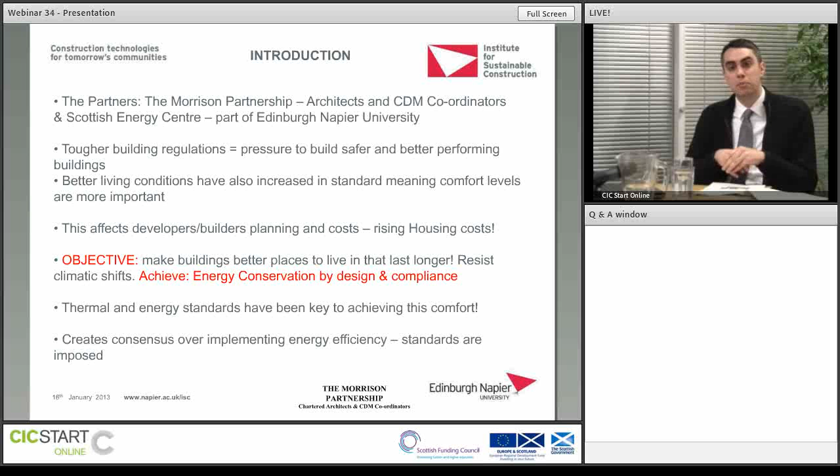A lot of these elements will be touched on in this presentation. How energy efficiency and the rating of buildings has become quite an important way of predicting how buildings are to be occupied and how to work. That's been an important element and benchmark that a lot of people take on board at design stage. Technical standards, handbooks, and technical details have also been very important, how people use those as a guide during design, or as a benchmark, is also important.

And the way different literature and guidelines, like the Sullivan Report back in 2007, has been really important in how policy has been framed, and how people's way of imposing standards and building regulations has developed. And obviously the European Union has been important as well in imposing a lot of these guidelines.

But really the study looks at the possible sources of this gap, which we will identify later on. It's this gap between what's been designed during a long research process in terms of design, and the occupant, and how that's been transported over to the construction stage and during early occupation. There's been identification of a big gap, especially in the energy use of these properties, and we'll be looking into all types of buildings in this report.

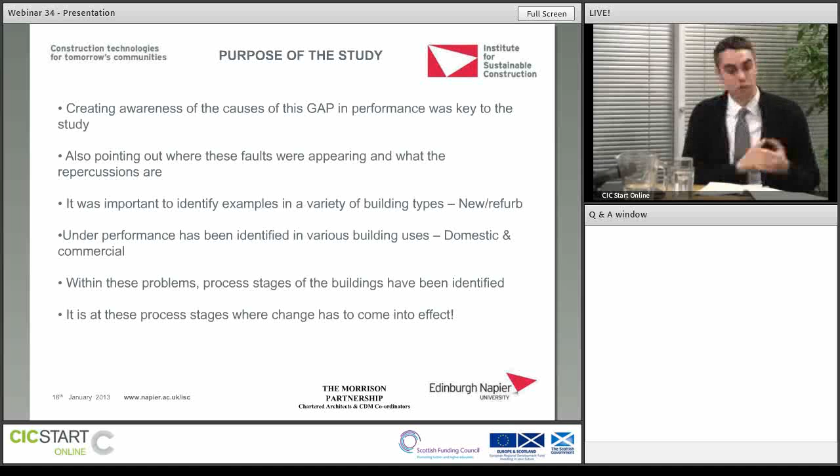I'm going to take you through the next few set of slides which try to establish the reason behind why we set forth on this path of study. On this particular slide, it begins to introduce, further down at these bullet points, some of the issues we early established with our research work.

First, we identified that for most buildings you would either be in the category of new build or refurbishment. The second area was whether or not you would be in the domestic sector, or we've called it commercial. You might read for that non-domestic, but it does have some importance to call it commercial, because it widens out the building types that are not covered by much of the research work.

Many organizations, such as NHBC, Good Homes Alliance, and the Carbon Buzz website, have done a huge amount of investigation and preliminary reports about this whole issue of a gap between design and build, and we've reviewed some of that literature. But what we wanted to do was broaden that view outside of housing to look at retail, offices, industrial, commercial premises, schools, factories, because there was very little focused research going on in that area—most was in the domestic area. So it's important that we're looking at both domestic and commercial fields.

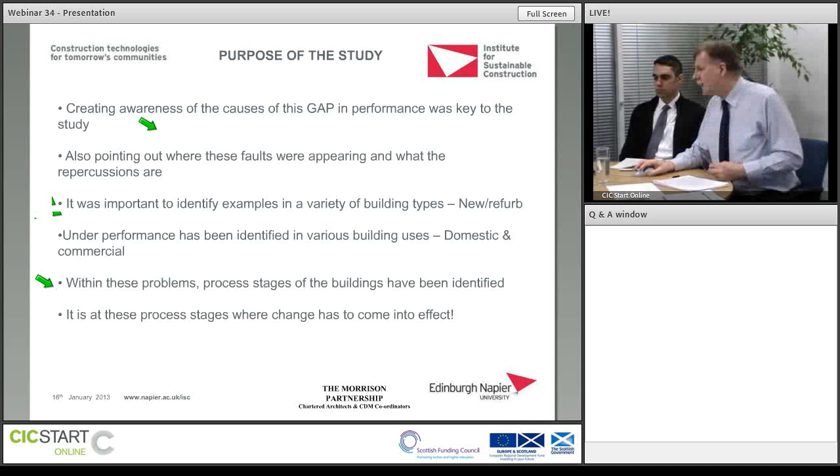The end user in the domestic sector may be someone in a housing association flat—they may have learning difficulties, they may not know how things work or how they're meant to work. Then on the commercial side you have a building maintenance manager who may be well acquainted with how the systems operate. So there's variety within these 12 sections of the proposal that require individual and specific streams of research. There will be crossover, but these are 12 good, solid areas which later in our presentation we propose will be a substantial outline for further research work—12 good areas to look at.

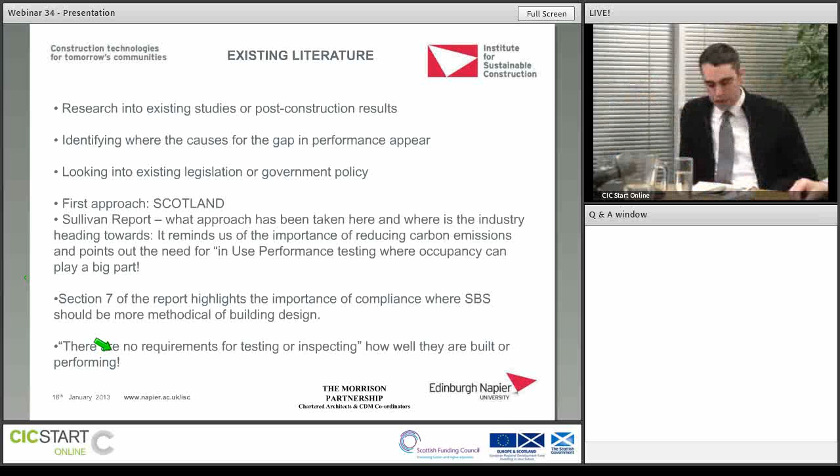Julio. Thank you, Cameron. As Cameron just pointed out, it was important for us, before diving into the real problems, to really explore what literature was out there, whether it was in the form of reports, websites, groups that were addressing such problems, and also post-occupancy results and surveys that had been done before, and really looking at some of the areas that were highlighted as problems. It was important to identify these causes through this existing literature. And really our focus, as it's been said at the beginning, was Scotland, looking at what has been done in Scotland, what buildings have been addressed, what problems have been encountered.

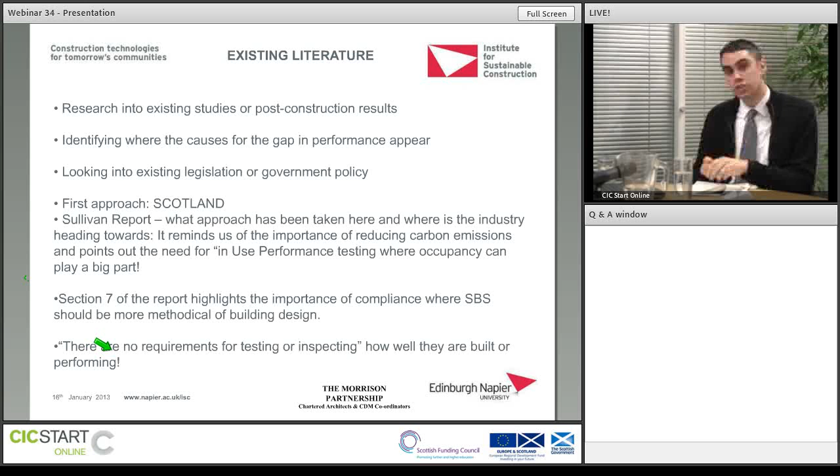It was also important for us to look into the Sullivan report. Although written and published back in 2007, before the bank crisis, it does point out very important elements that have been highlighted as action points that I think could be important to continue on. And in this situation, 2013, look at how it's been addressed and what to look out for in the future. And I think Section 1 and Section 7 in the Sullivan report highlight these problems quite nicely, and look at solutions as well. But really it's looking at testing, monitoring of buildings, coming up with a catalogue of results and benchmarks of buildings that have been assessed, and looking at occupational issues, etc. So that was important for us to read on.

It was also good to start exploring other avenues in terms of different professions, both the design professions, the architectural profession, the construction industry as well as a core. And one of them was the RIBA and any publications they had, together with the Carbon Buzz, as Cameron has pointed out before, but also looking at how the RIBA plan of work, which is used in the industry as a guidance on and sequence of elements to take on board while designing and tendering, etc., has a gap where the RIBA hasn't imposed a step for testing and monitoring of what's been built in any project. There is guidance on design, there is guidance on taking the project forward, but once it's been completed, there isn't that approach to seeing if it's performing properly. And we feel that is missing.

And we also explored documents very similar to what we've been looking at, a lot of them published by the NHBC, which are the core of housing and standards of living and construction. And they've highlighted through the NHBC Foundation, together with Zero Carbon Hub, some interesting booklets and also papers on these elements of performance and where the gap is, and we made a lot of notes on that. They've also got a lot of literature around predicting and the software used for such energy predictions, which I think are also important. And also looking at post-occupancy studies, for example, the Elm Tree Mews developed by the Joseph Rowntree Foundation as an example of a building being assessed and really inspected very thoroughly in terms of its performance.

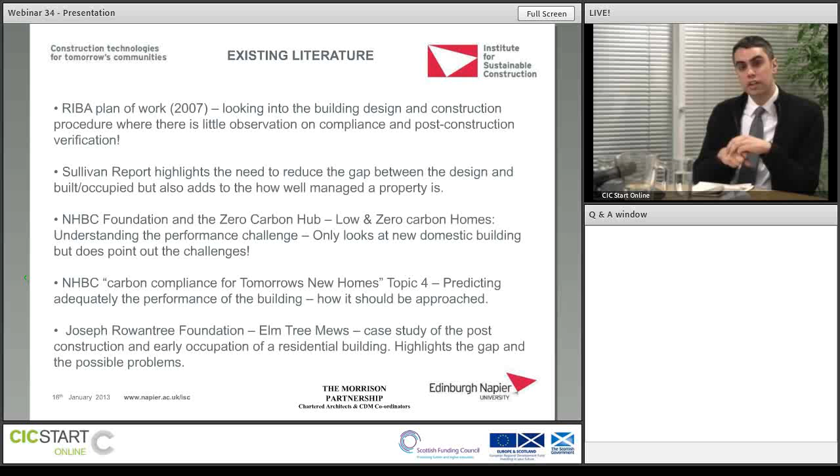But really, in conclusion, we've seen that a lot of the literature focuses on new build. A lot of the documents look at domestic problems and housing developments that have been assessed, but not a mixture of commercial, non-domestic, and also retrofit. We feel that a lot of it has been focused on the new build sector. And we feel that retrofit has, in this day and age where there's little money for new developments, a bigger role to play in terms of achieving better standards, and also proving that any work that's done on retrofit is actually worthwhile and important.

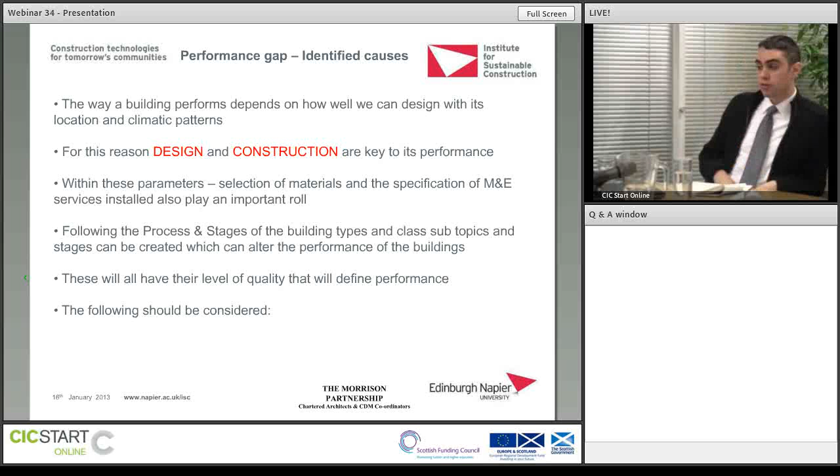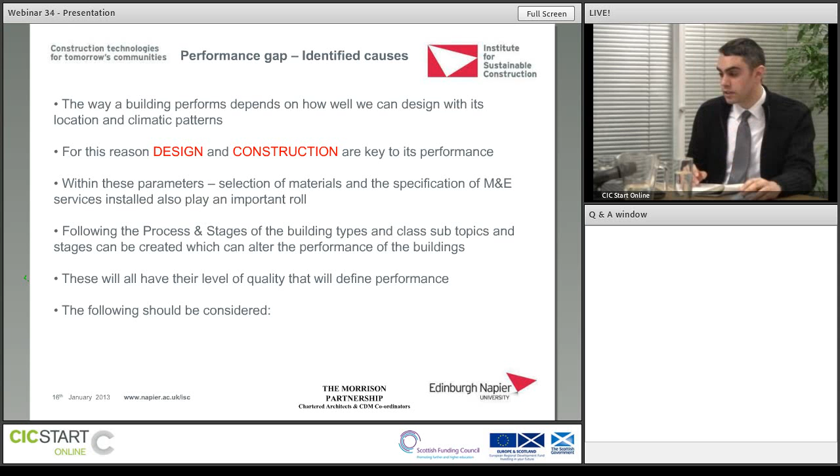So really, we move on to identifying these problems, and we've explored many of them. A lot of them around the design and the construction element, a lot of them around the prediction and also the actual testing of buildings. So it's important to really look at these points and see where we feel that further attention and further work is needed in the industry. And through the diagram that Cameron was talking about with the different stages and the different typologies of buildings, we feel that could be tackled quite nicely. But the following are some of the areas that we feel are important.

Already Cameron has talked about SAP as being one of the important tools within the design industry, and obviously the prediction of energy use of buildings. And that spans from the fabric of the building to the actual services that the building will have implemented into the everyday use of the building. But we've really got to put a lot of emphasis on the quality of the software, the information that it has, whether it's up to date, whether it is accurate enough.

A lot of the times it's very generic in terms of the materials used. And as we evolve as an industry with more innovative materials and more innovative building procedures, this software seems to be lagging behind in terms of updating this information. Although SAP and SBEM is updated on a regular basis, we feel that sometimes it's not at the same rate. And sometimes it could be down to the type of materials there, the climatic data, or simply the technology that it has.

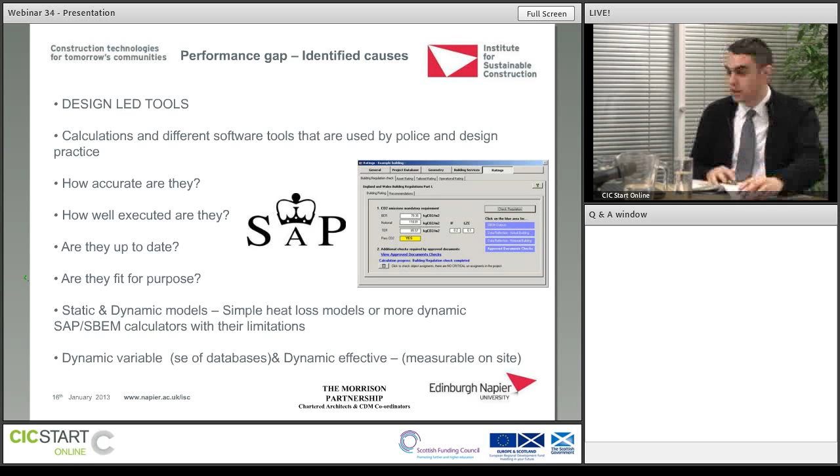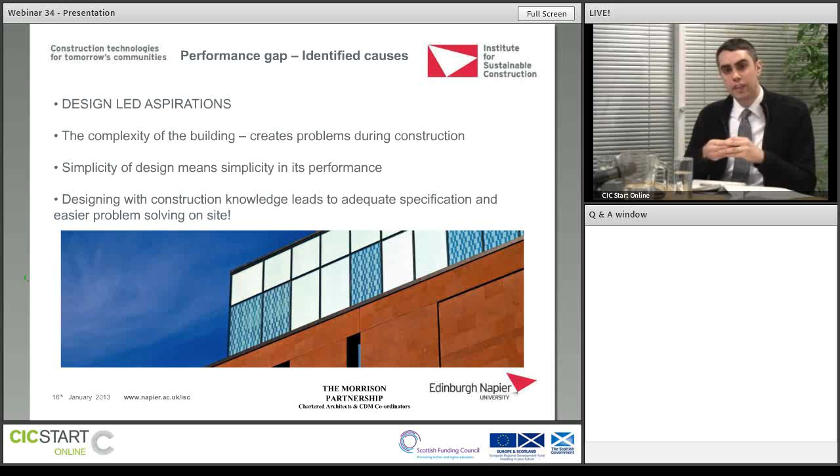Another element that we've identified is really the design-led aspirations and how complex buildings are becoming, and whether the design stage is building up detailing and proper detailing for the construction period, for the trades to understand properly, for different sequences between construction, if they have been thought of during design. All that contributes to how complex the design is and the building will be. So there has to be that understanding that whatever is designed has that thought of how it's going to be constructed, and generally that is taken on board, but a lot of the times that can bring some complexities later on, so that's important.

Another aspect is a design-led specification. We could be specifying very generic and very kind of common materials that are known to us very accurately. But in other forms, it's relying on third-party information. We are in the hands of information and testing that we don't know if it's accurate or not in terms of materials and performance, in terms of systems and technology. So we're really relying on whether that information is accurate.

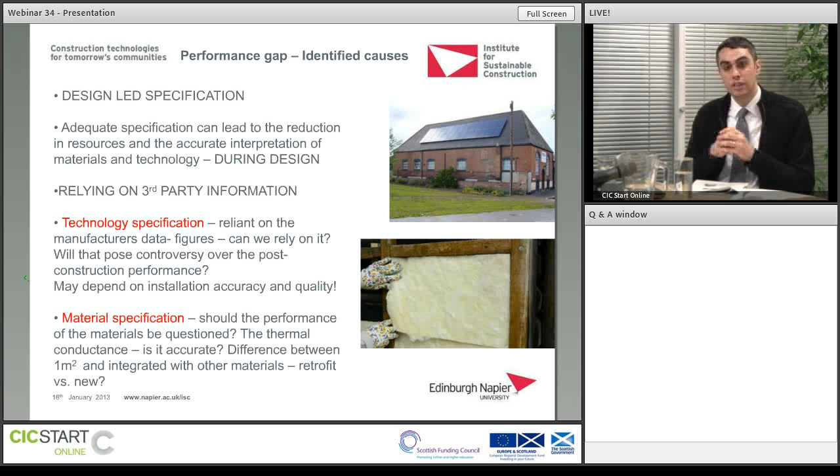And also thinking that most of that information is before it's been implemented and before it's been led into the building and once it's been occupied. So there's that difference. There's the performance of a material or a technology before it's been used and once it's been implemented and used. So there's two different efficiencies as such that have to be taken into consideration. So that's something that we feel is quite important.

And another topic is obviously on-site workmanship and the quality of build that we're having in the construction world. Are we relying on workmanship as it stands? Are the trades shifting? Are they modernising themselves to new materials, to new ways of building, to new standards? We're at design stage, we've got a set of guidelines that we've got to take on board. We've got to obviously have the SAP scores as high as possible. But is the building trade aware of this? Are they shifting with these standards at the same time as we all are? That's important. And that's where training skills and having these skills up to the higher standard is really important.

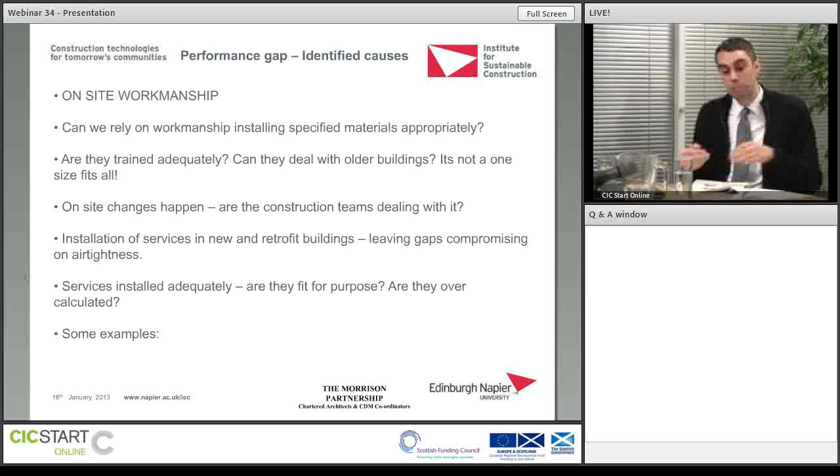Also looking at retrofit and whether people are knowledgeable enough on older properties. Are the trades and building professionals aware of older materials and how to integrate new procedures and new materials blended in with older materials? All that brings a lot of confusion on site, and if the proper professionals are not engaged and briefed properly, that can bring in a lot of problems that will later be shown within the performance of the building and create this gap that we're trying to identify.

And in the report we have quite a lot of examples that we've been involved in, both Cameron at the design aspect and the construction supervision and quality of build, and also ourselves in the Scottish Energy Centre looking at energy, heat loss, looking at elements in which it's quite evident where a lot of the gap could appear, and a lot of these are during construction, elements that have been missed or have just been badly installed.

And we've got photographs here where, for example, there are gaps in the structure. There's concrete slabs that have not been filled properly for whatever reason. We've got pipe work going through different layers of the building fabric without considering air leakage around it, and different ways of sealing or applying some gasket around pipe work. We've got missing insulation in some areas, near the eaves, for example, at rooftops, where there's enormous big gaps of heat loss or thermal bridging, where there could be energy escaping.

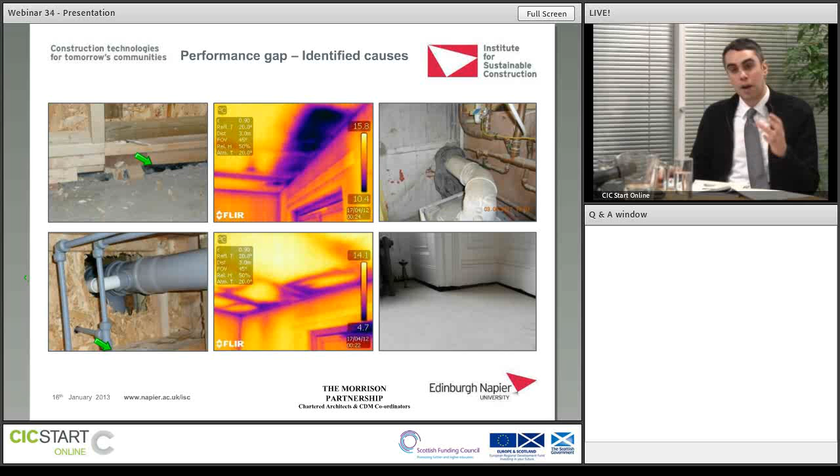And onto the retrofit area, where we've got a complexity of generations of pipe work that is no longer in operation, but has to be mixed or applied to different more up-to-date pipe work. So that confusion within the trades while dealing with retrofit is quite important. Gaps under skirting boards, etc. All that amounts into this percentage of increased energy use, which has been talked about previously.

And I mean, part of construction is on-site communication. As we know, when we design, we aspire that the project will continue with no problems, that the sequence that we've applied and that we've envisioned will go smoothly. But we know that once in construction, that doesn't occur.

And communication of any changes, of any stopping in different sequencing or changing in sequencing of materials or application of detailing has to be communicated properly to all the trades, so that possible changes and the reasons for some on-site or construction problems can be mitigated as much as possible.

And we've got elements that are kind of difficult to predict. You've got client changes during construction, you've got architectural changes as well. You might have delays for weather, you might have delays because of the budget and the funding for such projects, etc. So all these amount to changes that need to be communicated around.

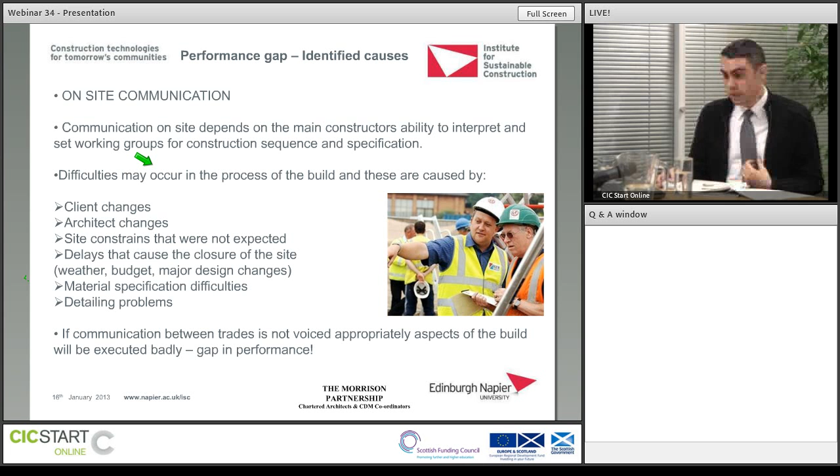So it's important also to link in to the retrofit way, and how we can monitor retrofitted buildings, because it's a whole different ballgame in terms of building and materials, etc. So the quality of that is really important. And the occupant behaviour.

It's difficult to predict during design time, and if predicted during SAP or SBEM or any other simulation software, most of the time that occupational use or pattern is modified, let alone the unregulated use of energy that is not taken into account in a lot of software these days. So all that accounts into how the building will be used, and eventually how much energy will be used in the building. So that's important, and that's where social patterns come in.

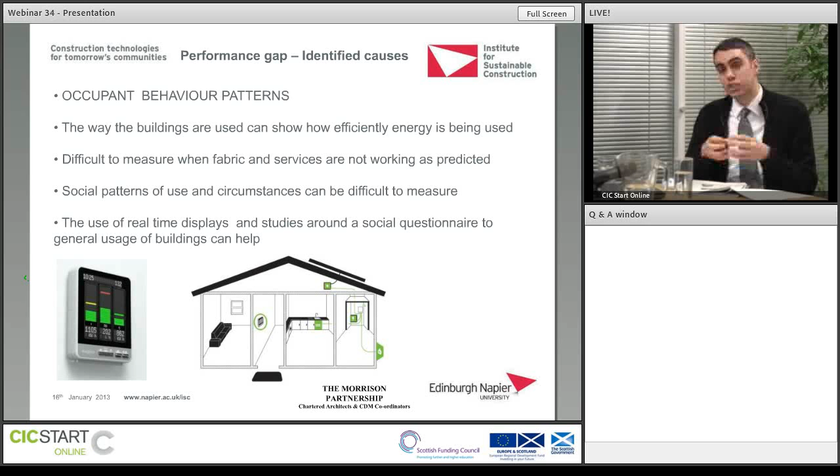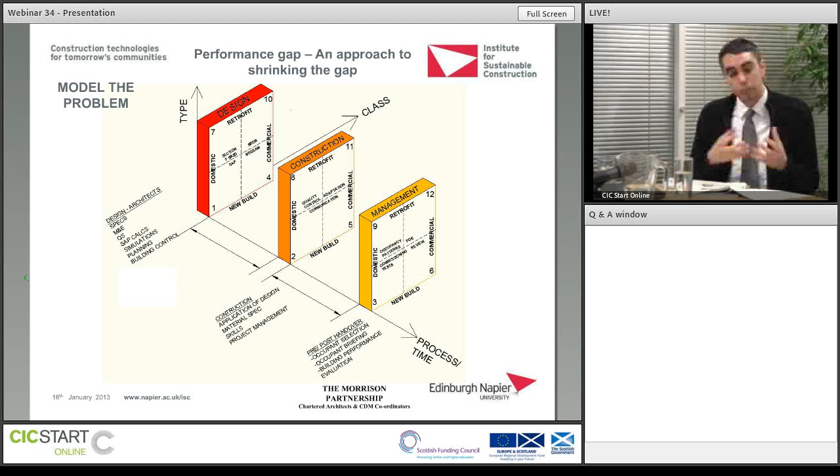You've got different elements of predicting this, and really having also technology that can measure the actual energy use, that can later on give us information on whether it is as accurate as predicted. I'm going to pass on to Cameron to talk a bit about our approach to shrinking this gap after identifying all the different elements of problems. Thank you very much, Julio.

I want to chat just for a moment about the diagram that we have on the screen here. Let me just pick up the little arrow here. Do I have to click that there? Is it a click and drag, or...? It should be once you click it in, but... There we go. Yep. Right.

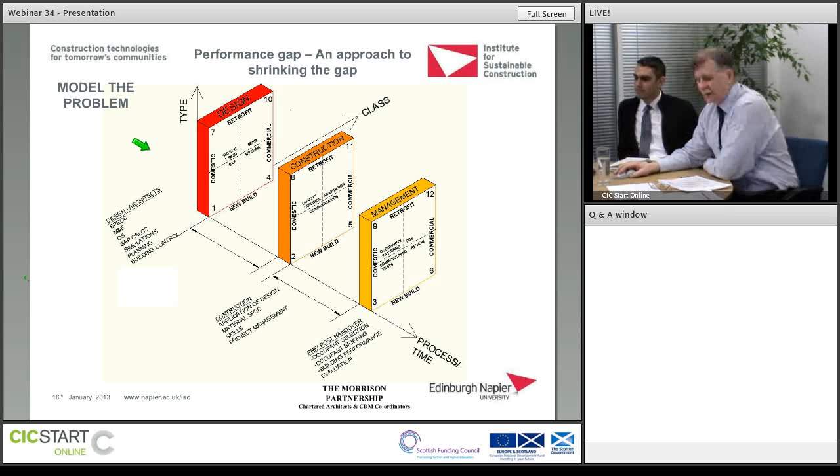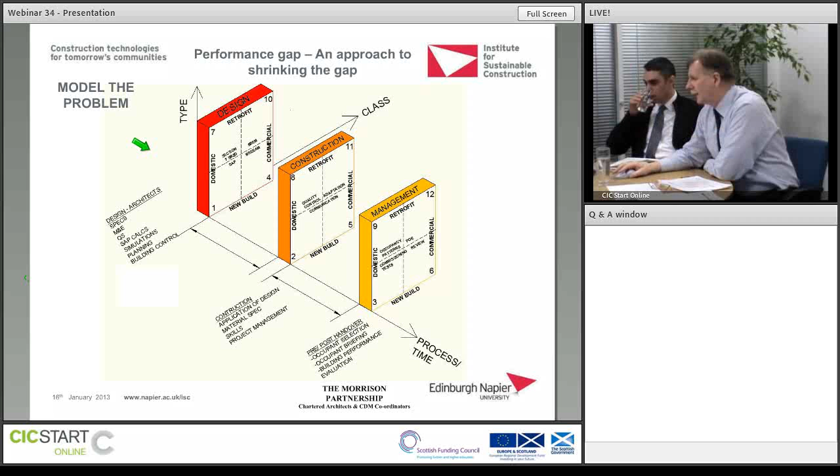This little diagram is meant to be the three-dimensional conversion of the two-dimensional tree that we were discussing earlier in the presentation. We took that two-dimensional tree and put it into this X, Y, Z coordinate system to show along the X coordinate the process as might be followed by, for example, the RIBA plan of work over time. The Y-axis indicates the difference between domestic or non-domestic commercial within each project, and the Z dimension takes the variation between anything that may be regarded as new build up to refurbishment.

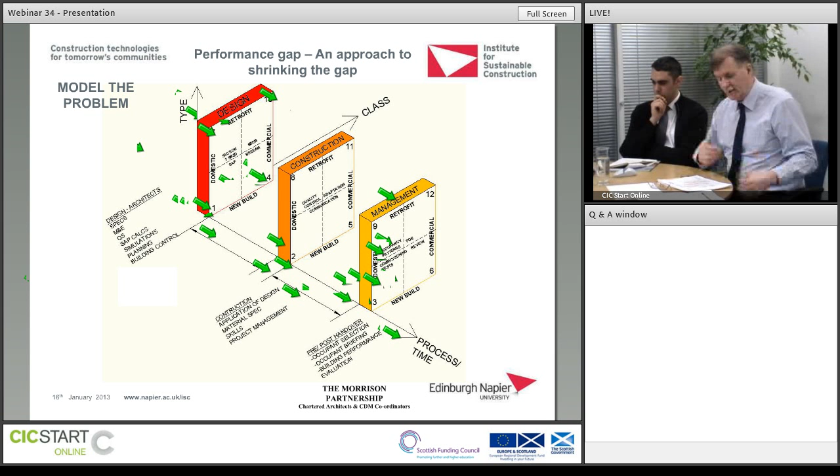And so within this three-dimensional modelling of the problem, we began to identify the various areas where the research strands would be fitting. You can see here that the numbers in each of the corners relate to the 12 research strands that we identified earlier. And within each of these planes, you can see some of the issues that will be occupying some thought, for example, in the management section, things like occupancy patterns, commissioning tests, and post-occupancy evaluation. And so you can see three-dimensionally the complexity of the whole performance gap issue from start to finish across all sectors, across all types.

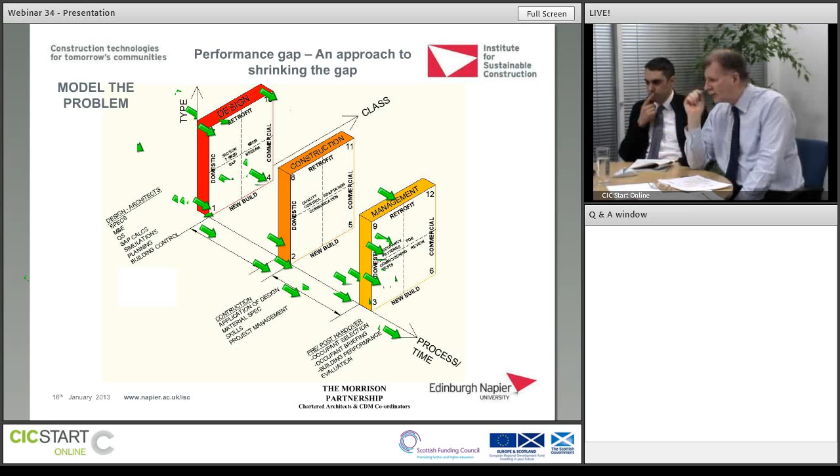I don't really want to dwell any more on this diagram, save to say that you could look at it perhaps after in replaying this webinar. But it's important because it starts to model the problem. Julio and I, in beginning this initial modelling stage, may well take this further and develop some more ideas about it. But it's a first stage, and it came out of much of the research work that Julio has been describing in the past 5-10 minutes. So I'm going to pass back now to Julio to take us through some of the other slides which lead us into some of the approaches we identified to start to shrink the gap.

Thank you. Well, as I've identified before, we could probably differentiate the different approaches together with that model on the fabric performance, on the technology and the services performance, and also on the occupants.

Approach and occupancy patterns. But we know that fabric performance could be described as a kind of known science in terms of how we calculate U values, how we identify heat loss, and how we can try and reduce that kind of wasted energy in a lot of our envelope around buildings.

And there's a big distinction between new builds and retrofit. In new builds you've got a bigger scope in terms of a design stage where you can plan and better model a building, and in retrofit you've really got that element of investigating what we have and making a survey of the actual current performance of the building. Both of which obviously have different solutions and different approaches.

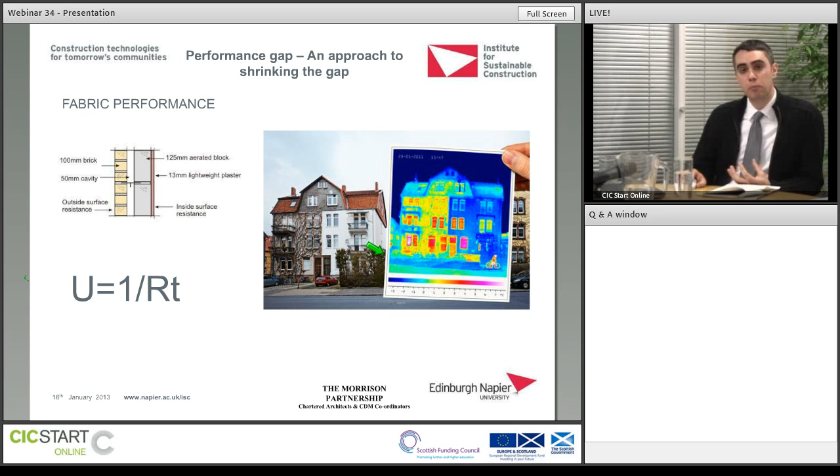But addressing fabric is really important, and that's one of the areas where we feel there has to be more focus. From predicting and monitoring using infrared thermography and looking at ways of insulating properly in retrofitted buildings, or from the actual new build aspect of really detailing as close as possible any junctions or any elements.

But there are areas where, while we're predicting, while we're designing, it's very difficult to really model—it could be from repeated timber studs, for example, in a structure. We could very easily design something that is every 600 centres and doesn't really have any problems on the predicted side.

But once we get on site, once we're building that, it might be that there could be repeated studs for whatever reason, because of the sequence or because of various changes on site, etc. So that might change the phenomena and just the way that wall or that envelope might work. And we know that by having these elements, we could have more heat loss and more thermal bridging.

And that is the same in junctions, and having different areas of thermal bypass, for example in walls, adjacent walls, and ventilation shafts, etc. All these elements are very difficult to model and to predict. So there needs to be more focus, more information on that.

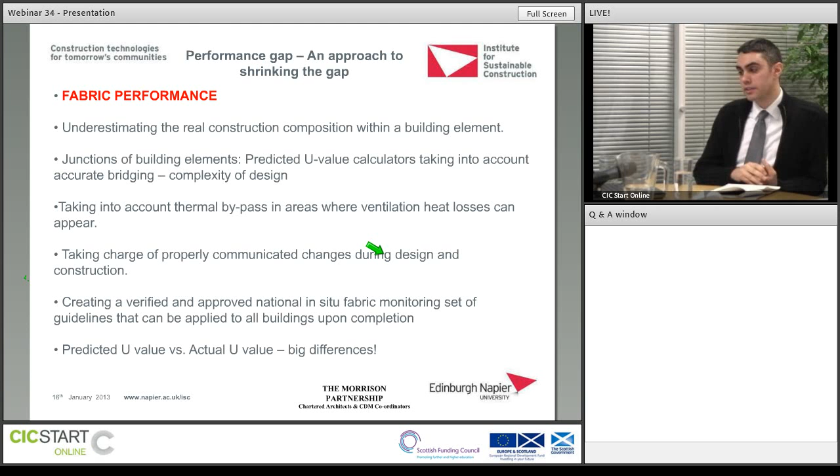It's also looking at how in situ testing can be fed back into software to get more information on that. And that is where a lot of our studies at the Scottish Energy Centre have identified that in fabric performance, the use of predicted U values against actual U values—the disparity there is enormous in some instances.

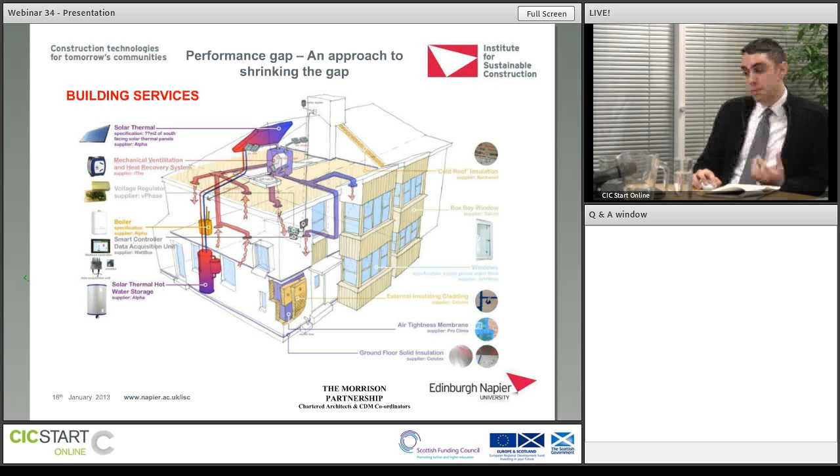The same goes for building services. We have now more of a complex approach to buildings. We have these so-called intelligent buildings, from the actual controls of the buildings to the actual use of energy, whether it's for obtaining energy, the use of renewable energy and renewable technology, to the actual zoning and the use of whatever heat or electricity that's been distributed around the building.

So we have a vast majority of complex systems these days in our buildings. But we know that with an enhanced fabric, with a better detailed and better insulated fabric, the heat loss will be less, therefore our need for energy will be less. So the sizing of building services and technology could be smaller.

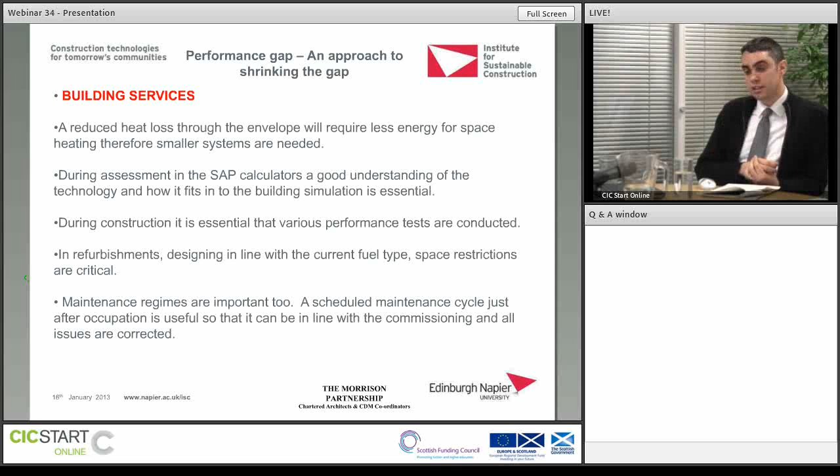So elements like those and that analysis of building technology and services is key. And also trying to get a lot of the tools and the prediction tools, for example SAP and SBEM, to adapt at the same rate as a lot of these changes are occurring with new materials and new technology out there. So simulation of these is important.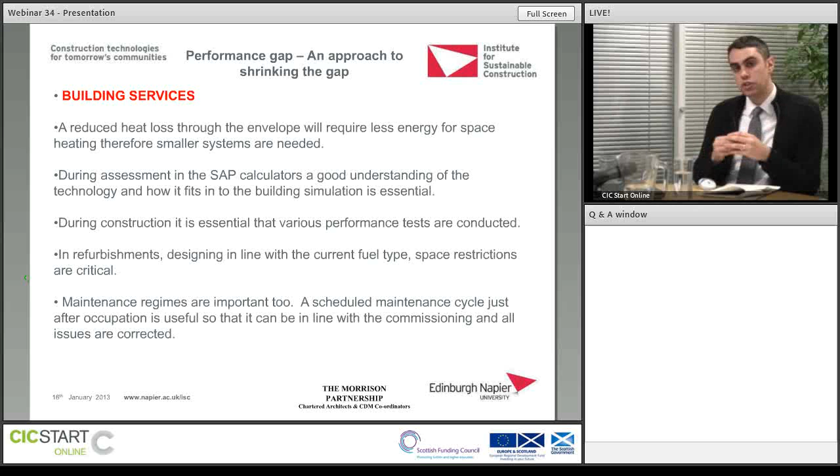Refurbishment is important as well in trying to implement new technology, new pipework into current installations, and the way we survey that and look into that is vital as well, and hopefully that will reduce this gap in performance. But also maintenance is a key part of building services, not just sizing a technology, but also how we're going to have a maintenance regime that can be set at the beginning of building, during early occupation, and maybe at set times around the use of the building.

And finally, it's the building user. It's this problem of making the building user aware that there's new technology, new fabric being implemented in the building. Therefore, there needs to be a different use of the building in terms of using energy within it, and the behavioural patterns within it. A lot of designs are designed with occupant numbers and a specific use for a room or building, but often the end user might change their mind, or change of hands of different properties changes the use of different rooms, bringing in different occupational patterns. So those have to be as flexible as possible during the design stage.

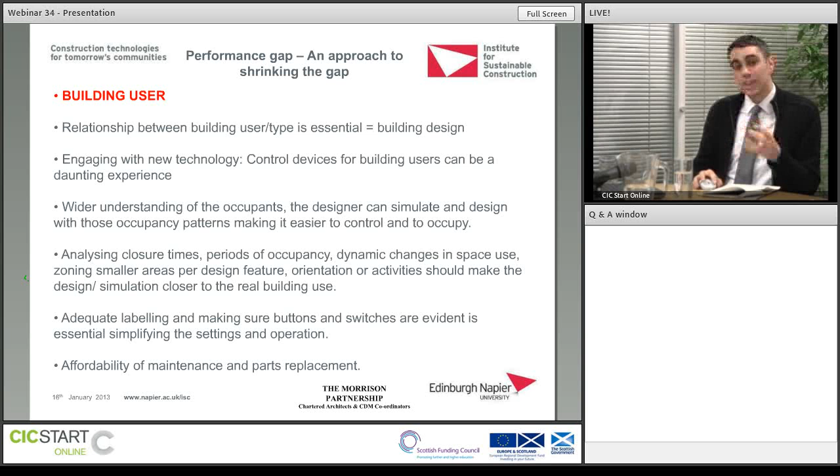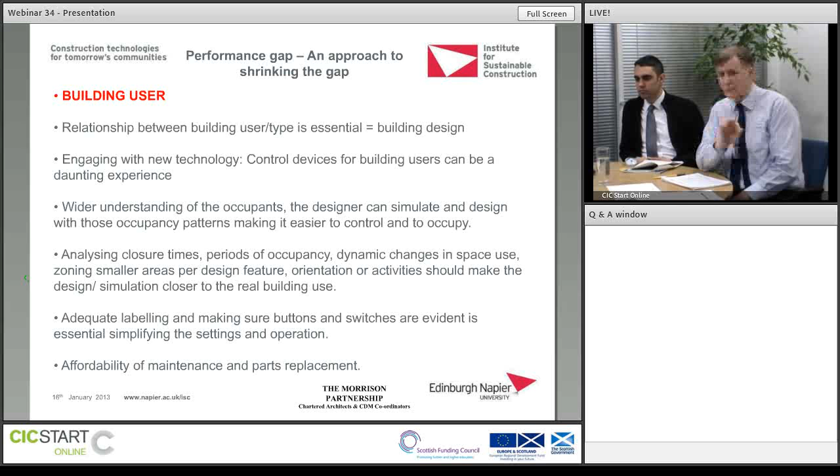Could I just reinforce a point there on that particular slide? It is in relation to Carbon Buzz - I would advise people to look at the Carbon Buzz website, a good platform for information. One thing I particularly like about it is that it identifies two key issues in mostly non-domestic properties that tend to bump up CO2 emissions: lighting and unregulated electrical use. Lighting is obvious - very often people just walk out of the office and leave the lights burning all evening, which bumps up electricity consumption, energy demand, and CO2 emissions. That really needs to be tackled, especially non-domestic.

But it's the unregulated electrical use - this is all the appliances used throughout offices and factories, but also in the home, anything from TVs to handheld devices. There is nowhere within the SBEM or SAP calculations where you're able to monitor or input information relating to that type of use. One house may have heavy use of unregulated electricity, another with just one person may not - it's very difficult to predict. I suppose there needs to be some guide put in initially to the SAP calculations as to what the unregulated energy consumption will be for any property. But very often, according to the Carbon Buzz website, there's a huge disparity between the designed understanding and what actually happens by way of the building user using that power.

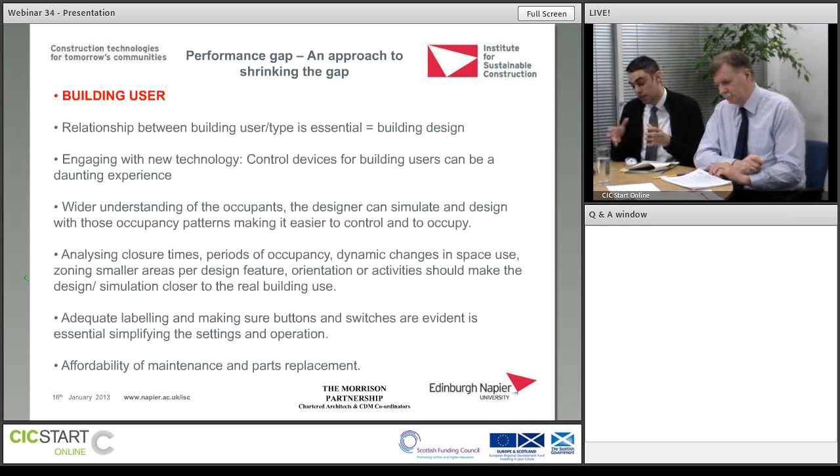I think also around that topic is really the understanding of the building user of the building, and that's where the use of building guides - how to use your building, especially as it becomes so complex - is quite important. A lot of it's been applied in housing complexes by housing associations etc., where you have a user guide explaining every element of use of the building. A lot of the time this technical data is very blurred and not user friendly in terms of using new technology, and that's where a lot of disparity in actual use is important, with evidence of increased energy use once occupied and throughout the years.

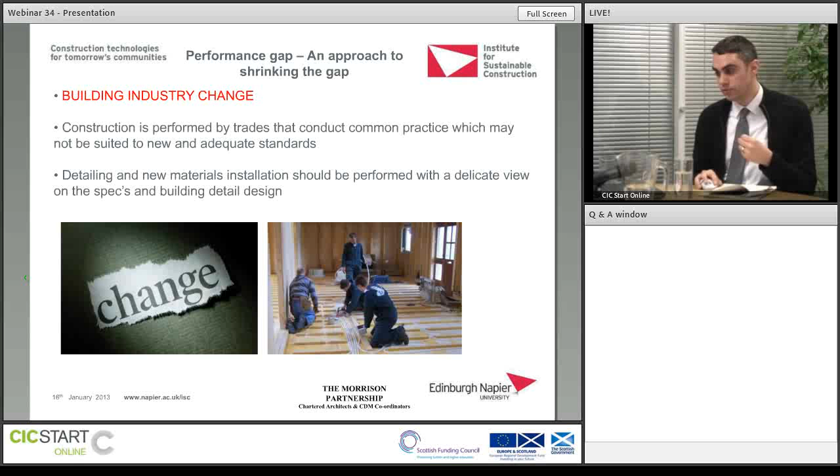So I'll hand over back to Cameron on some final points. That's fine, thank you very much, Julio.

I'm just going to take through a couple of slides before we come to our conclusion section. This particular slide on building industry change is really just identifying that in general there is a huge need for a cultural change in terms of the way in which both designers and constructors, as well as building occupiers, all need to take a huge, long, hard look at what we're doing in much greater detail than in the past. All of us will need significant training to come to terms with the standards we should be working to if we are to achieve the targets by 2020.

And also, in terms of continuous improvement factors, we wanted to summarise a few points here. We've spoken repeatedly about post-occupancy evaluations. I know a lot of that does go on, especially within the housing sector. That's something that really does need to be examined much more closely in the non-domestic sector, because even just glancing at the Carbon Buzz website, that is a significant problem.

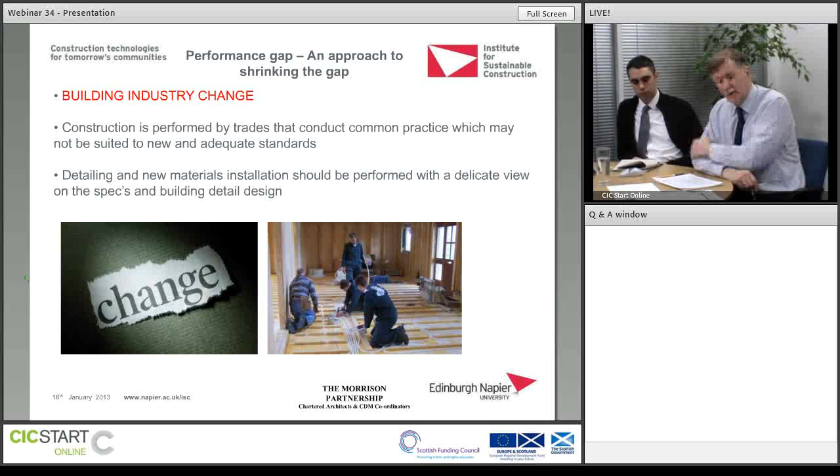Of course, there is now the energy performance certificate, which is to be displayed on properties in the reception entrance area, which will indicate ongoing monitoring and performance of the building to users of the building.

By and large, Julio and I were just discussing whether or not there could be or should be some mechanism for bringing together the energy likelihood of that building at the completion stage, and the council being able to have a better handle as the verifier on the performance of that building at completion. I think that's where the RIBA plan of works could be quite important, in that it could be added to the last stages of the plan of works during the design course and construction.

But just on the conclusions, really we're preparing ourselves for better standards, better building regulations, and there's no better time than this one to really recognise these elements that are increasing this performance gap and trying to tackle them. It could be on an industry and individual level, the design professionals, the construction, etc., or it could be as a whole, trying to address these points and really trying to minimise this gap as possible.

And the Sullivan report, they are reconvening. It would be interesting to see if more focus and more emphasis is on this benchmark of performance, so that people could relate to that, whether it's during their modelling and design stage, or whether it's on a post-occupancy side. But we feel that the Sullivan report should be addressing this, and hopefully the expert panel that has come up can do that. But at the end of the day, we need more data, and that's where benchmarking is important.

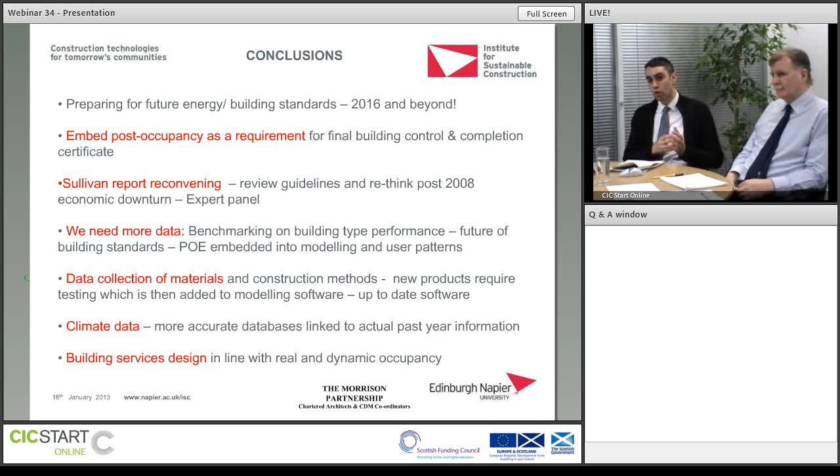We need more data also on materials. There's no use in just having data from older lists and older materials. We need to be testing more materials. We need more testing facilities in Scotland. That's important for us. A lot of the manufacturers and a lot of the products that are developed in Scotland have to be tested down in England, which is a big cost for companies, which obviously affects the quality of the products. So we need that in Scotland.

We also need this collection of materials and to embed them into more up-to-date software. Climatic data, we need all that is important in order to bring this predicted performance gap, at least at the beginning, as small as possible.

And I mean, this model again, we feel it's important to introduce, really to recognise these points, and also have all these stages that have to be addressed within the design, construction and management, which we feel is really important. But refurbishment is important as well.

We know that there are new funding mechanisms out there, the Green Deal, the ECO, that rely on predicted performance. And sadly, a lot of those predicted performances are linked to an economic and a cost model that will rely on these predictions. If after the work has been done, these predictions are not true or are just not performing as stated, the economic payback will be enormous, and a lot of people will be quite aware of that and not really engage on these elements. So this is important in terms of refurbishment.

And I think some final slides and aspects from Cameron. Thanks, Julio. I've got my eye on the time, and I'm looking to just close over in these last couple of slides.

I'm not going to go through the detail of this slide on the screen just now. However, what I want to do is briefly describe to you the process of getting from this stage to this stage. This will be, if you like, a scoping exercise to be able to start to gather that information, which will then enable us to provide the information for setting up better modelling techniques, for looking at government policies and also government legislation.

Once we have been carrying out this scoping exercise, it will begin to start to help feed into more focused research work. It will give us a proper understanding and base from which we will then be able to coordinate different organisations or different people who are looking at specific areas within their own silo of information.

They will be able to share that, because as you can see from the three-dimensional diagram we had, there is a great deal of cross-fertilisation within different sectors, within different building types. And this, of course, from the research, will lead to action, and that is the final part of this slide, which is about making sure that all of us as designers, constructors, and building operators and managers will have a cultural change which will significantly lead to the reduction in CO2 emissions.

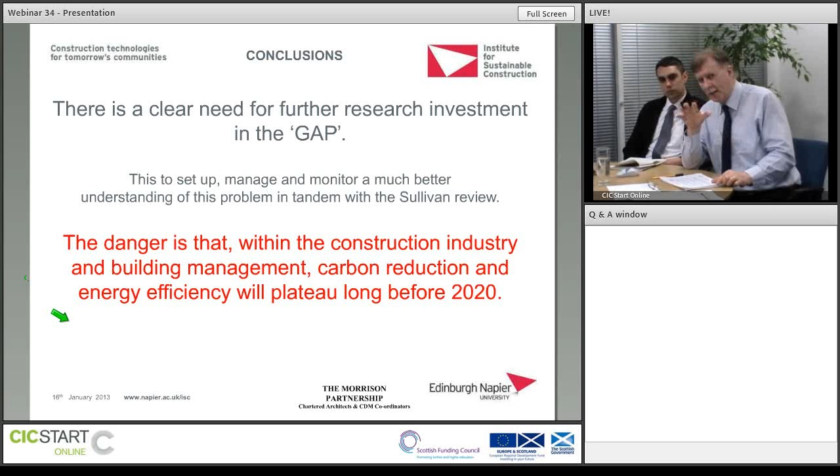And finally, a slide that I'm just going to leave with you, and I just want you to take one second to read that text in red. I wrote it perhaps on the spur of the moment late one night. Just read it. It says the danger is that within the construction industry, that's the building people and building management, that's all of us continuing to operate our existing houses, carbon reduction and energy efficiency could well plateau well before 2020. That is, I think, one of the main concerns we have, and I believe in my heart that much of what we've shared with you today, the reason why we may fall short of some of those targets, is simply because we are not engaging properly today with where the gaps actually exist. And I think it is perhaps the main aim today is to share with you those gaps, share with you the thinking, so that perhaps all of us can start to focus our attention, whether we be designers, constructors or users, to be able to focus our information much more so.

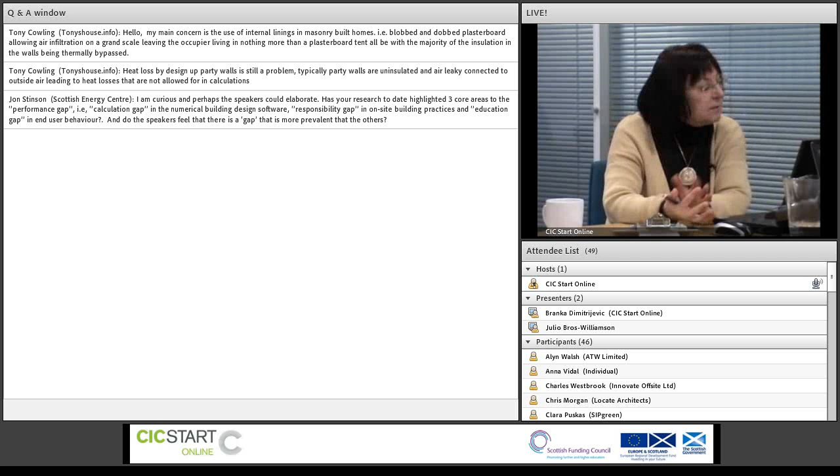Dr. Obuks Ejoh, who thanks for the presentation, has questions because he's involved in research entitled Awareness of Energy Retrofits in Owner-Occupied Houses in Developing Countries. Some of his questions emerging are as follows. First of all, the role of BIM, Building Information Management, or modeling, in the future of this kind of research. They have some expertise in there, might be a scope for collaboration, which you can follow.

A question: what is the real cost implication for the homeowner? And finally, he thinks that the focus should be on retrofitting, since there are fewer new buildings. Adding also that homeowners are not sold on the incentive for cultural change, and that is a challenge that is emerging from their ongoing study. So a few potential collaborations there.

And one more question from Mojgan Green of CAF: Do you not think that if design and construction details were submitted at planning stage for approval, the gap between design and construction would automatically decrease?

I was aware that was the way the design and construction details are. At planning stage? Oh, at planning stage, okay, before, to have a bit more time, yeah. Well, you wouldn't typically show construction detailing at planning stage. Some planners may ask for specific details for a specific look or appearance on a building, but generally speaking it would be at warrant stage.

It's funny because one of the seminars that I was at recently by a Scottish Government-based website was identifying the fact that actually, and this is an interesting point that last comment person raises, very often the most significant savings that can be made in reducing carbon dioxide into the atmosphere will be made at the strategic planning stage. The earlier you make decisions about that, the better. So it somewhat reinforces that earlier comment, but obviously in terms of detailing, there's not so much at planning stage, but the commenter is right.

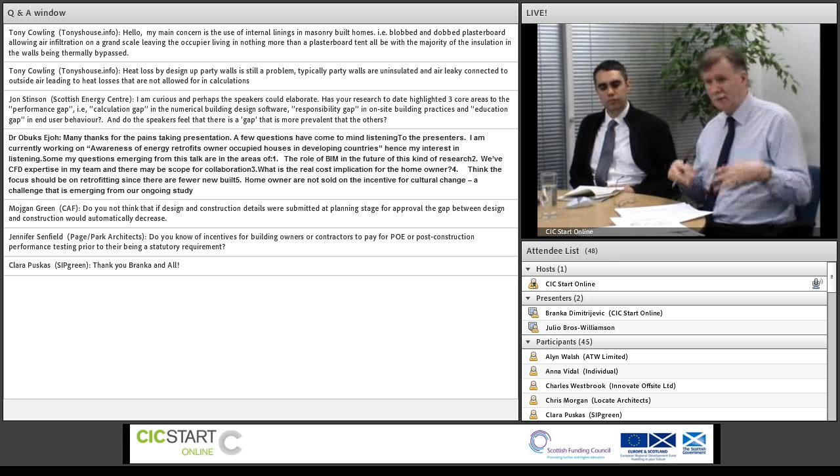I think that is why today we are anticipating that we would like to have further funding for further research to build up a stronger picture, to be able to influence government decision making and therefore legislation. And I do agree with many of the comments that have come in that there is a dire need for that. And I think that's where the monitoring, the post-occupancy evaluations, and having this catalogue of projects and products as well, can feed into this weighting side of things, and looking at the importance at different stages can be really key to giving the priority to the different problems.

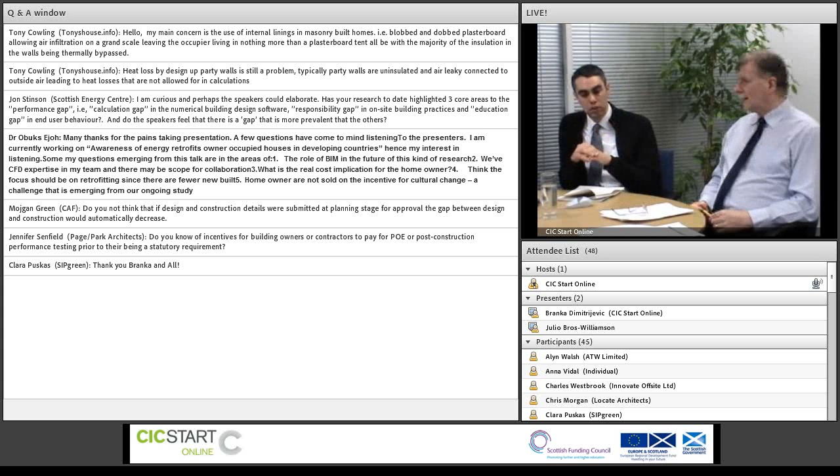And although there is an issue with cooling in buildings, and that may be more prevalent to southern European countries, obviously our presentation is very much a Scottish-based thing, and the further north you come, even coming out of England and the Carbon Buzz RIBA CIBSE platform, there really isn't anything in Scotland that we believe is beginning to help to present that information.

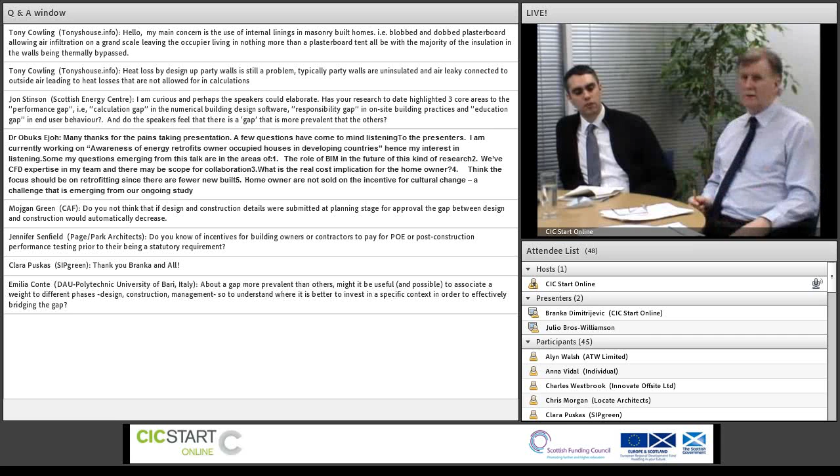So it is very much a Scottish thing that we're talking about here, and clearly it has a much greater impact in terms of energy consumption in our colder regions here than it does as you go further south into Europe. But there's obviously the cooling issue there.